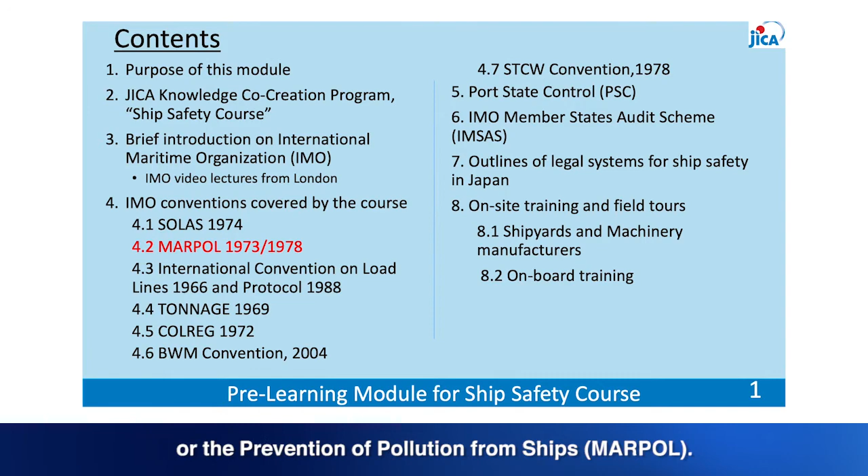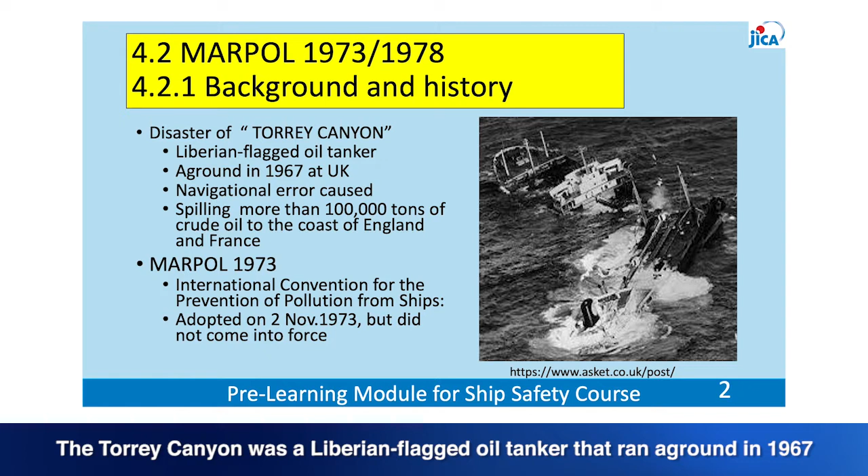MARPOL is the main international convention covering the prevention of marine environment pollution by ships from operational or accidental causes. This slide introduces the Torrey Canyon disaster. The Torrey Canyon was a Liberian-flagged oil tanker that ran aground in 1967 off the western coast of Cornwall, England. The accident was caused by a navigational error. When the ship struck a reef, more than 100,000 tons of crude oil was spilled along the coasts of England and France.

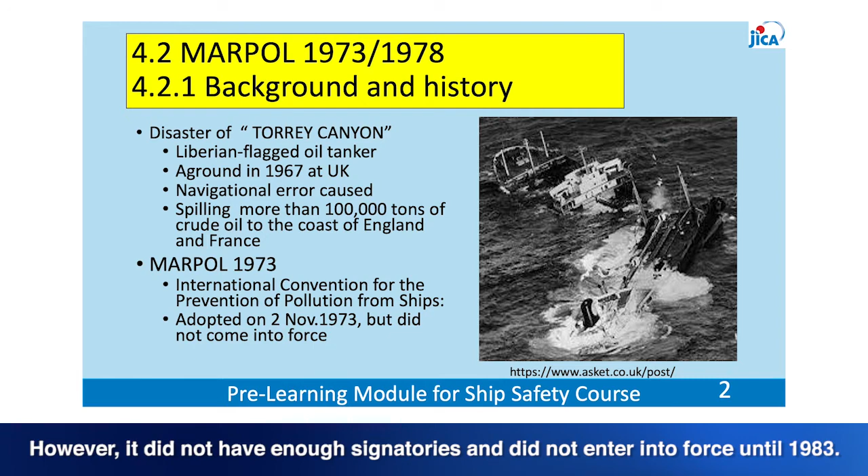MARPOL 1973, the International Convention for the Prevention of Pollution from Ships, was adopted on 2 November 1973 by the International Maritime Organization. However, it did not have enough signatories and did not enter into force until 1983.

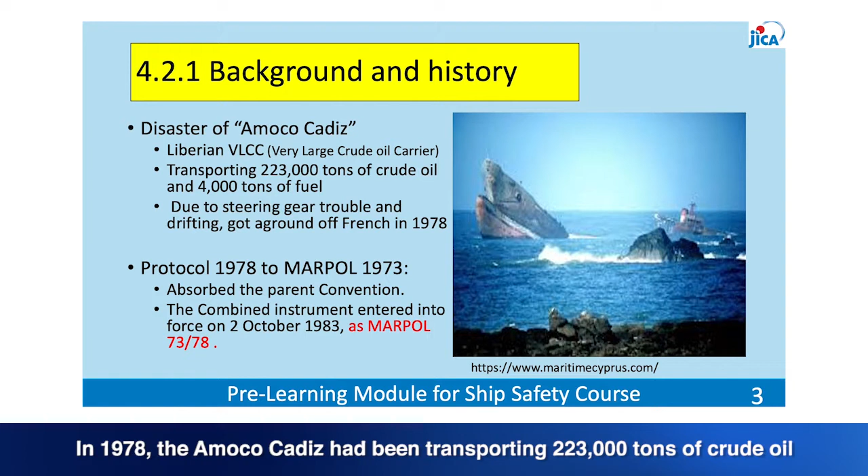During the late 1960s and 1970s, many oil tanker accidents occurred resulting in serious oil pollution. One of the worst was the breakup of the Amoco Cadiz, a very large crude oil carrier (VLCC) registered in Liberia. In 1978, the Amoco Cadiz had been transporting 223,000 tons of crude oil and 4,000 tons of fuel when it ran aground off the French coast after a storm damaged its helm controls. The ship broke in two, spilling its entire cargo of oil.

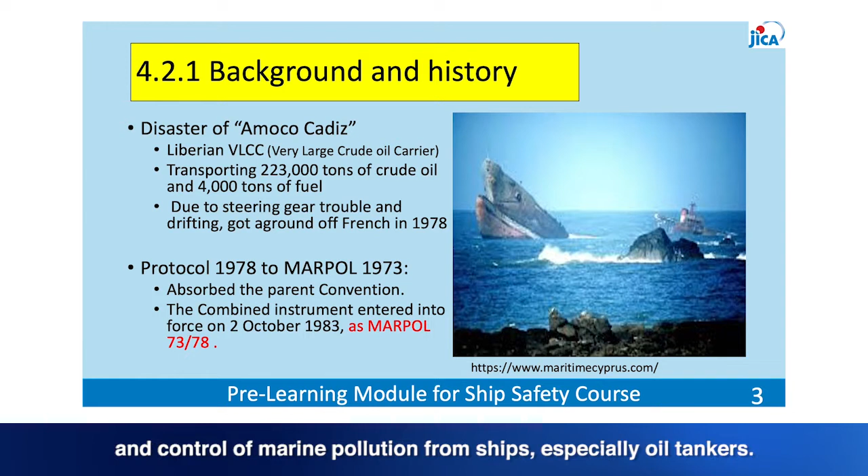Following this and other disasters in 1976 and 1977, the Protocol of 1978 was adopted. Because the 1973 MARPOL was not yet in force, the Protocol absorbed the parent convention and amended. The Protocol included regulations to enforce the prevention and control of marine pollution from ships, especially oil tankers. It entered into force on 2 October 1983 and is known as MARPOL 73-78.

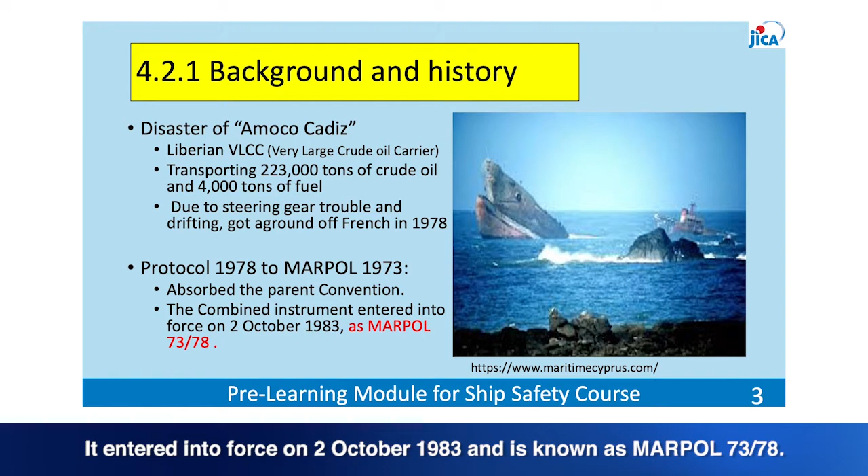The Convention contains the following annexes: Annex 1, Oil. Annex 2, Noxious Liquid Substances (NLSs) in bulk. Annex 3, Harmful Substances Carried by Sea in packaged form. Annex 4, Sewage. Annex 5, Garbage. Annex 6, Air Pollution. The annexes define essential regulations for the prevention of pollution from ships. The most recent, Annex 6, was introduced by Protocol 1997 and entered into force on 19 May 2005.

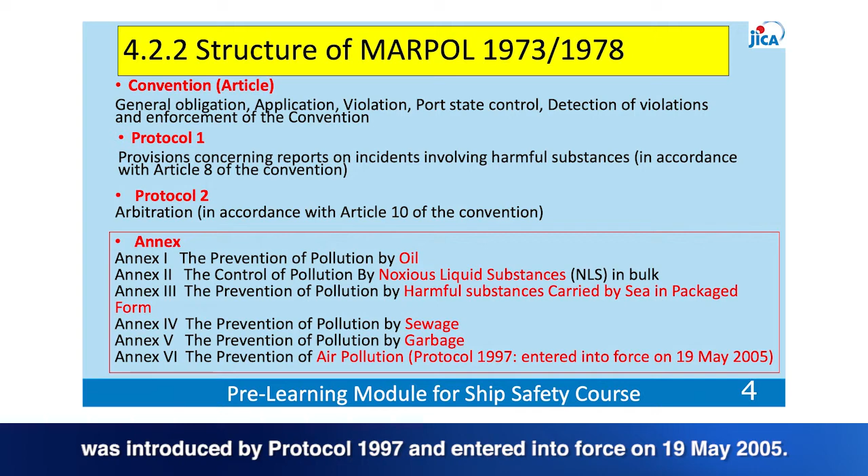This section presents the outlines of MARPOL. Annex 1 covers the prevention of pollution by oil from operational measures and accidental discharges. Regulation 6 is concerned with surveys. Under this regulation, every oil tanker of 150 gross tonnage and above, and every other ship of 400 gross tonnage and above, is subject to initial, renewal, intermediate, and annual surveys.

The 1992 amendments to Annex 1 made it mandatory for new oil tankers to possess double hulls, and also devised a phase-in schedule for existing tankers to be fitted with such hulls, which was subsequently revised in 2001 and 2003. The amendments will be explained in the following slides.

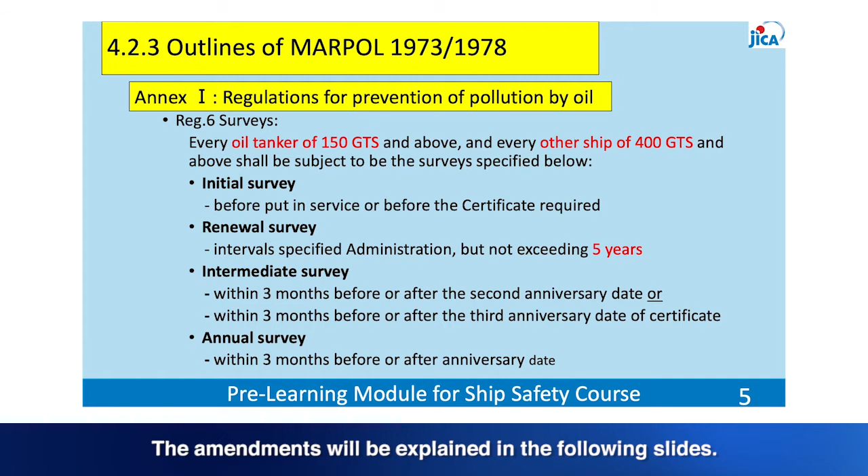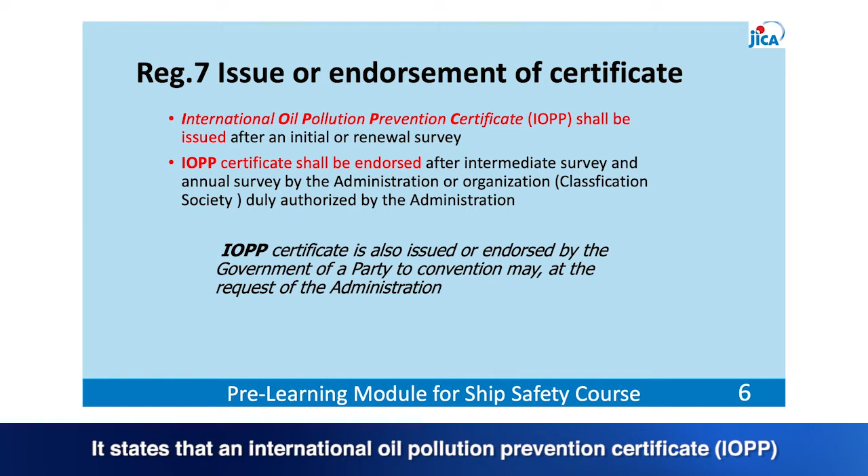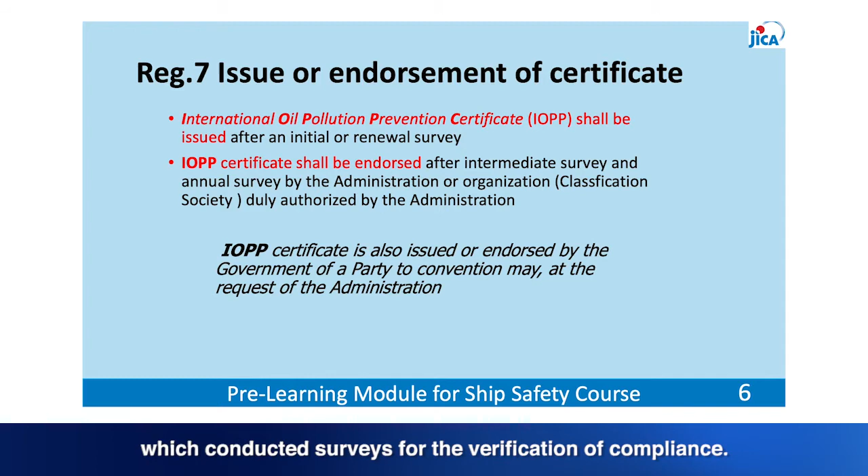Regulation 7 is concerned with the issuance or endorsement of certificates, specifically proof of compliance with Regulation 6. It states that an International Oil Pollution Prevention Certificate (IOPP) shall be issued after an initial or renewal survey, and is endorsed after intermediate and annual surveys by the administration or recognised organisation (RO) which conducted surveys for verification of compliance. Regulation 10 is concerned with the duration and validity of certificates.

It defines how long certificates remain valid before they must be renewed. This slide shows the typical survey schedule and validity of certificates.

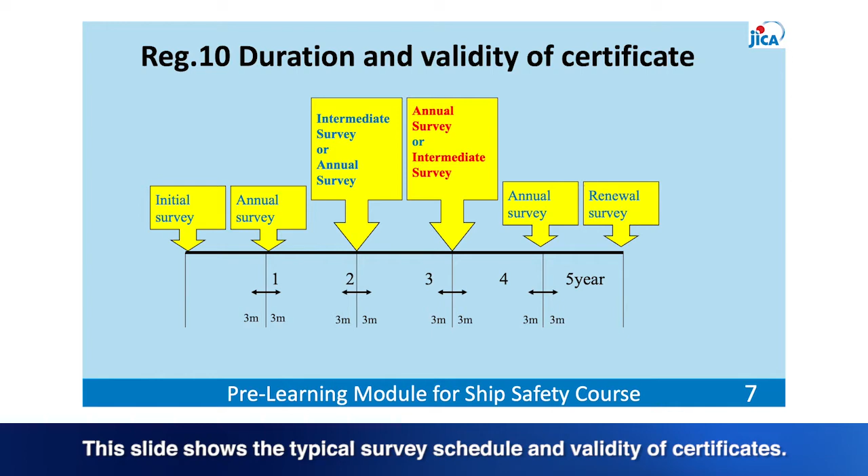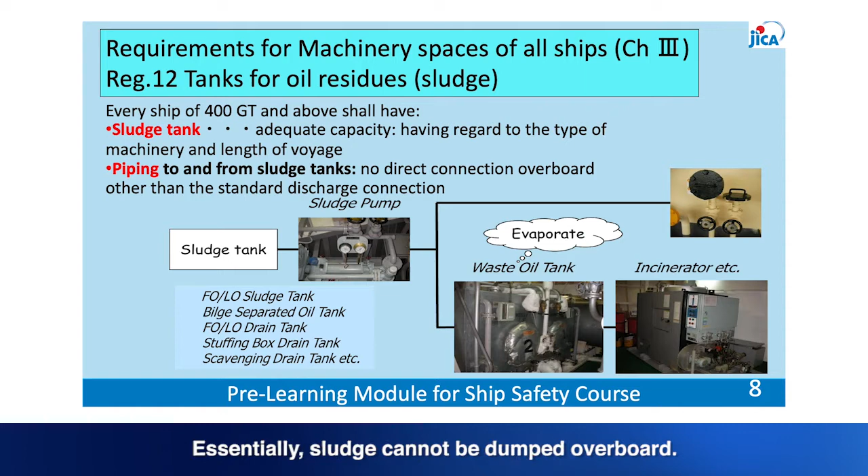Annex 1's Chapter 3 is concerned with the requirements for machinery spaces of all ships, specifically the handling of ship's bilge and sludge. Regulation 12 requires that every ship of 400 gross tonnage and above has a sludge tank with adequate capacity to hold oil residues. Its piping must go only to and from the tanks, with no direct external connection other than the standard discharge connection to the onshore facility. Essentially, sludge cannot be dumped overboard.

Under Regulation 12A on oil fuel tank protection, ships with an aggregate oil fuel capacity of 600 cubic metres and above, delivered on or after 1st August 2010, must comply with this regulation. Individual oil fuel tanks shall not have a capacity over 2,500 cubic metres. Ships must be constructed with a double hull or comply with accidental oil fuel outflow performance standards as indicated in this slide.

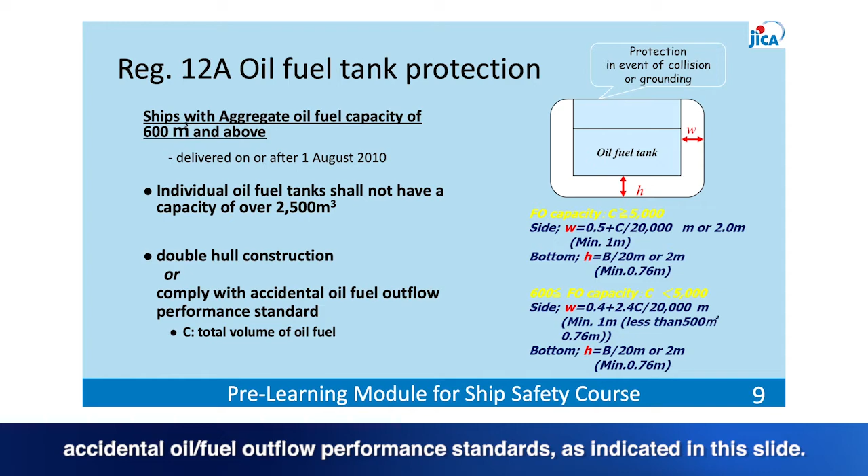Regulation 13 is concerned with the standard discharge connection, specifically the ship-to-shore transfer of ship's bilge and sludge. The ship's discharge pipeline for residues from machinery bilges and oil residue shall be fitted with a standard discharge connection for shore facilities, as indicated in this slide.

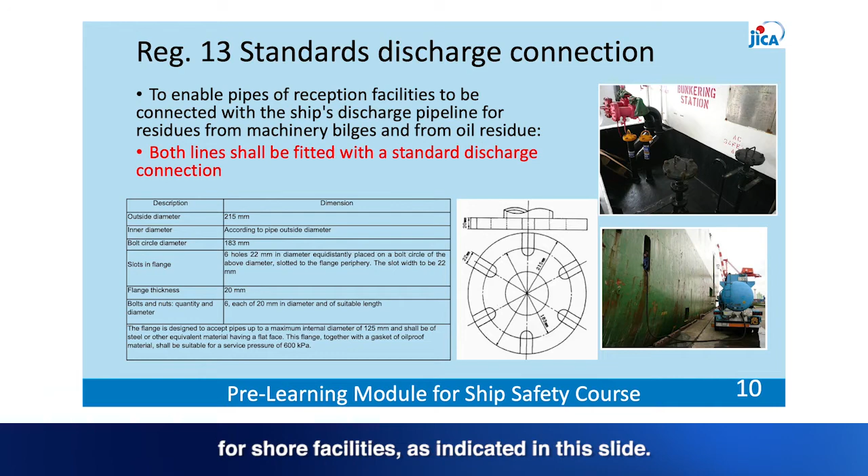Regulation 14 is concerned with oil filtering equipment. Under this regulation, any ship of 400 gross tonnage and above, but less than 10,000 gross tonnage, shall be fitted with oil filtering equipment complying with paragraph 6 of this regulation, that is, equipment that automatically stops discharge into the sea when the effluent's oil content is 15 ppm or higher.

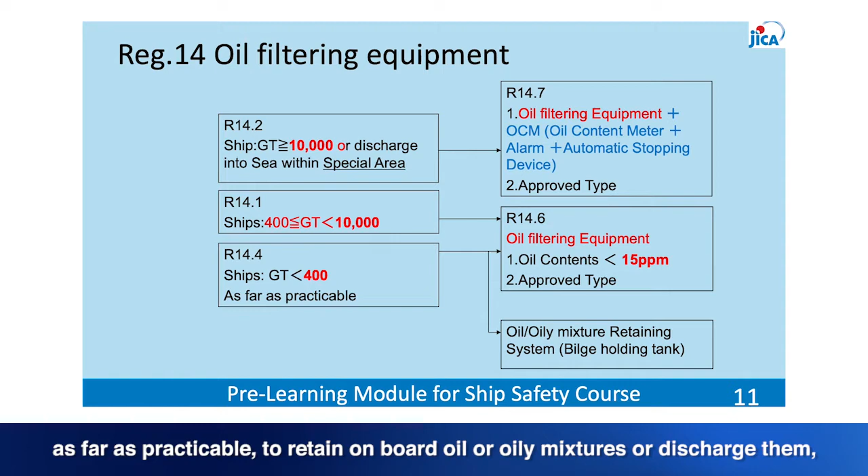Any ship of 10,000 gross tonnage and above shall be fitted with oil filtering equipment complying with paragraph 7 of this regulation, that is, equipment that automatically stops discharge into the sea when the effluent's oil content is 15 ppm, and has an oil content meter with an alarm and automatic stopping device. The administration shall ensure that ships of less than 400 gross tonnage are equipped, as far as practicable, to retain onboard oil or oily mixtures or discharge them through the oil filtering system.

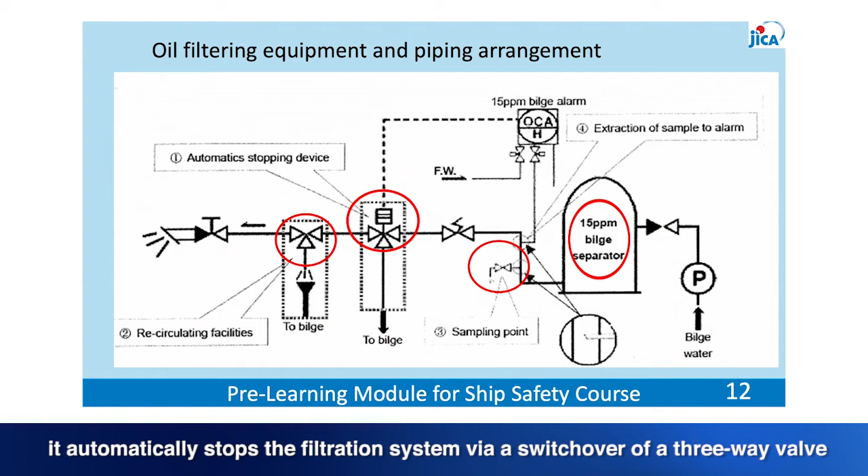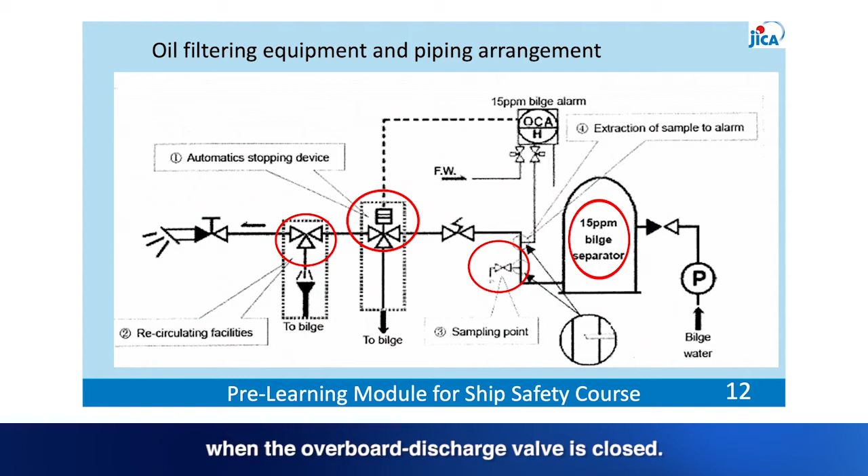It automatically stops the filtration system via a switchover of a three-way valve and an alarm on the oil content monitor. The automatic shutdown activates at an oil content of 15 ppm. Recirculating facilities enable the automatic stopping device to be tested when the overboard discharge valve is closed. A sampling point must be provided in a vertical section of the bilge separator's outlet piping to allow a visual check. This slide shows the oil filtering equipment and accessories.

During this course, there will be a technical visit to Taiko Kikai Kogyo Company Limited, one of Japan's leading manufacturers of oil-water separators.

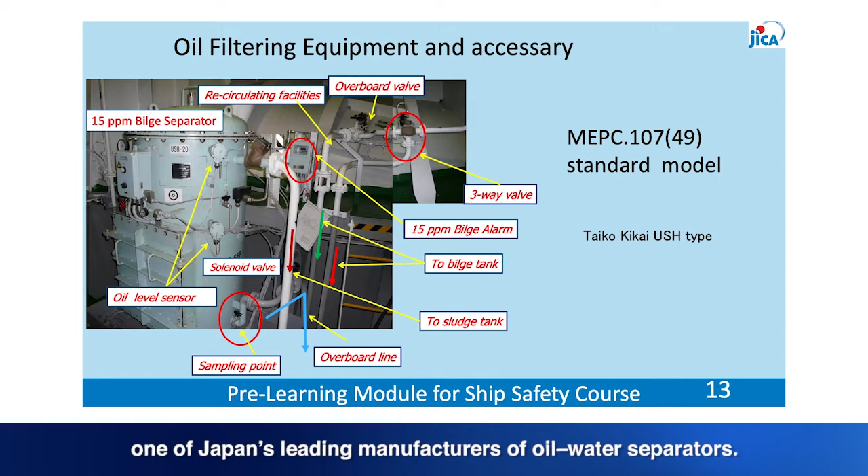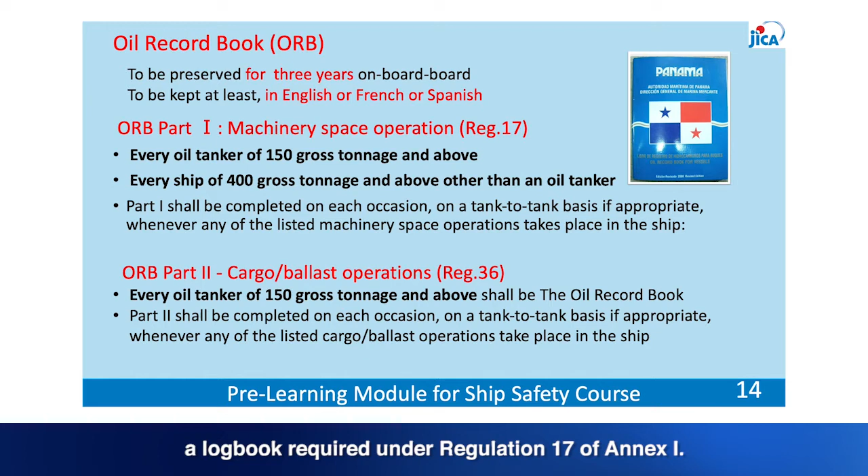This slide shows an example of an oil record book, ORB, a logbook required under Regulation 17 of Annex 1. The ORB is used as evidence in case of oil-related incidents. A ship's ORB must be preserved for at least 3 years after its last entry. The entries must be made in at least either English, French or Spanish.

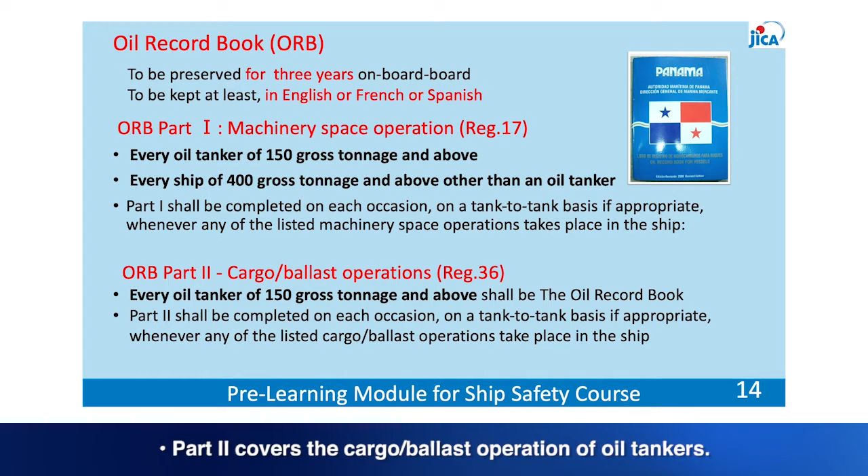Part 1 of an ORB covers the machinery operation of all ships. Part 2 covers the cargo and ballast operation of oil tankers. Chapter 4 of Annex 1 covers the requirements for the cargo areas of oil tankers. Regulation 19 mandates a double hull and a double bottom for oil tankers delivered on or after 6 July 1996.

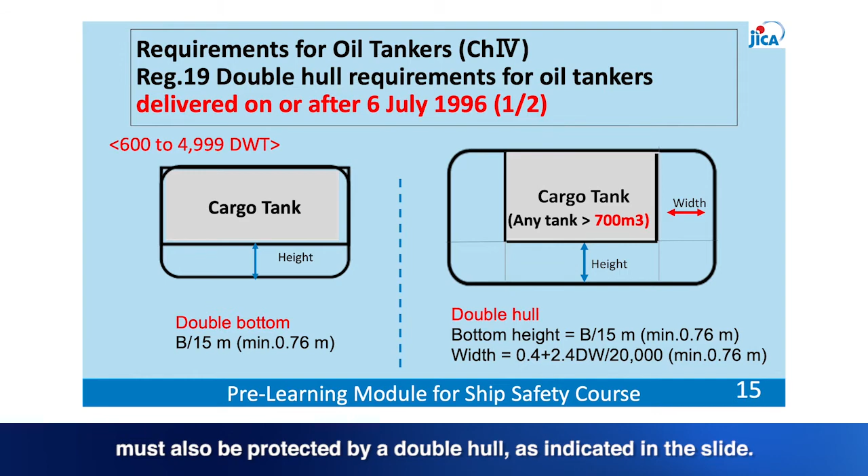A double bottom must protect the cargo tanks of every oil tanker of 600 deadweight tonnage and above, but less than 5,000 deadweight tonnage. Any cargo tank more than 700 cubic metres must also be protected by a double hull, as indicated in the slide.

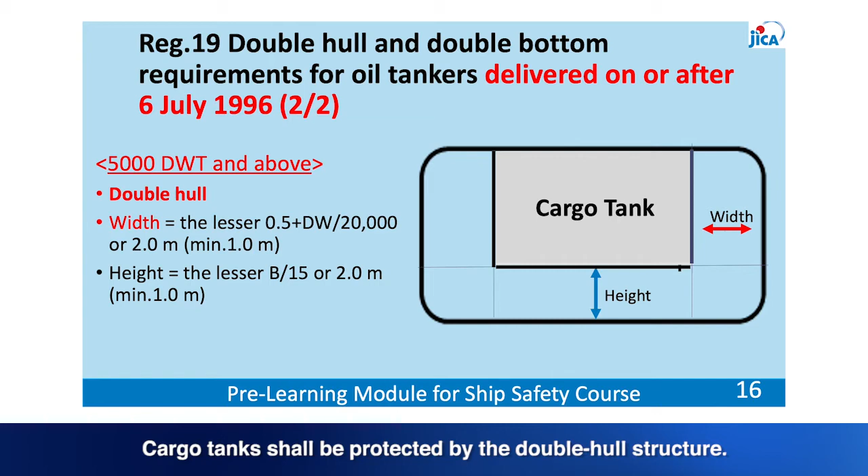This slide shows the incidence of serious oil spills caused by old single-hulled oil tankers. The first is that of Erika, a 24-year-old Maltese-registered oil tanker that leaked about 20,000 tons of fuel into the sea after it sank off the coast of northwest France in a storm in December 1999. The next is that of Prestige, a 26-year-old Greek-operated single-hulled oil tanker that sunk in a storm off the coast of Spain in November 2002, spilling 60,000 tons of heavy fuel oil.

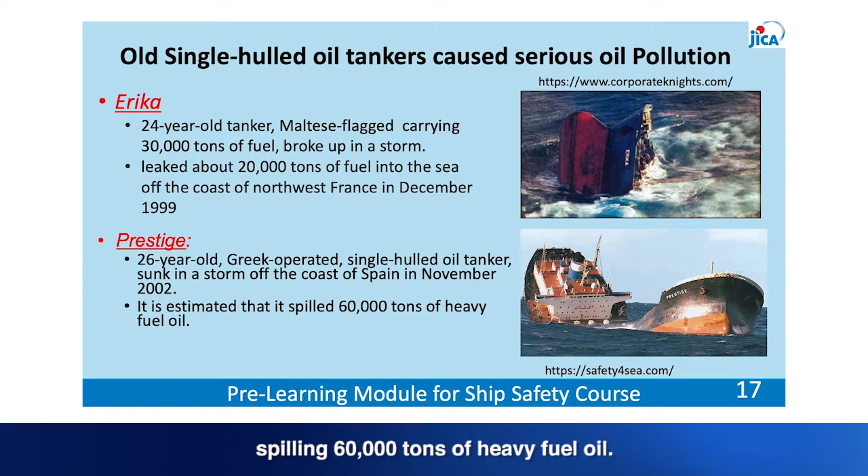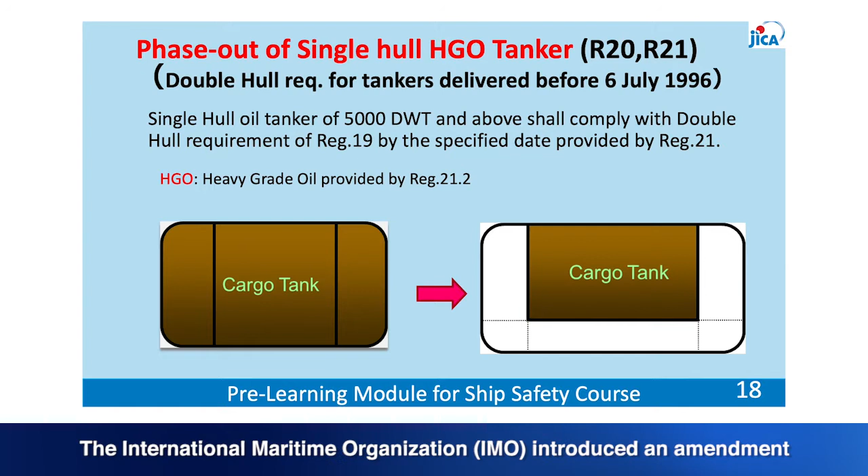Regarding the phase-out of single-hull heavy-grade oil HGO tankers, the double hull requirements of Regulation 19 apply to oil tankers delivered on or after 6 July 1996. However, in consideration of the many serious oil-polluting disasters associated with old single-hull oil tankers, including those shown in the previous slide, the International Maritime Organization, IMO, introduced an amendment to speed up the phase-out of single-hull HGO tankers.

MARPOL Annex 2 covers Regulations for the Control of Noxious Liquid Substances, NLSs, in bulk. Annex 2 details the discharge criteria and measures for the control of pollution by NLS carried in bulk. Some 250 substances were evaluated and included in the list appended to the Convention.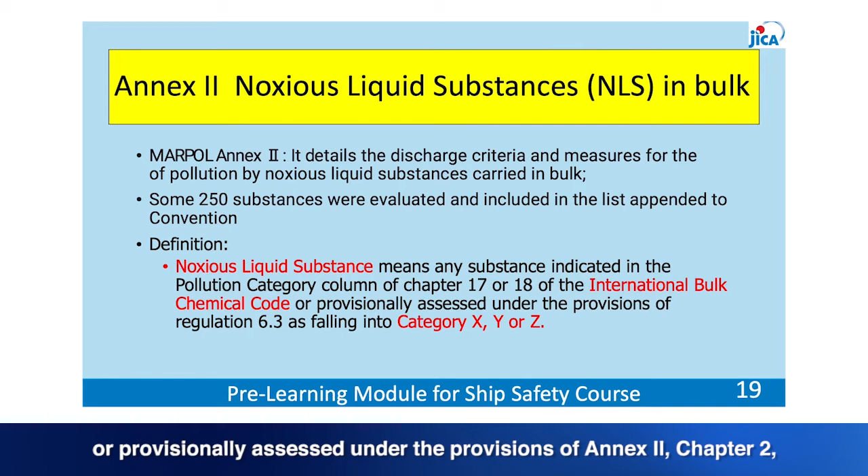Noxious liquid substance refers to any substance categorized as a pollutant in Chapter 17 or 18 of the International Bulk Chemical (IBC) Code, or provisionally assessed under the provisions of Annex 2, Chapter 2, Regulation 6.3, as falling into categories X, Y, or Z.

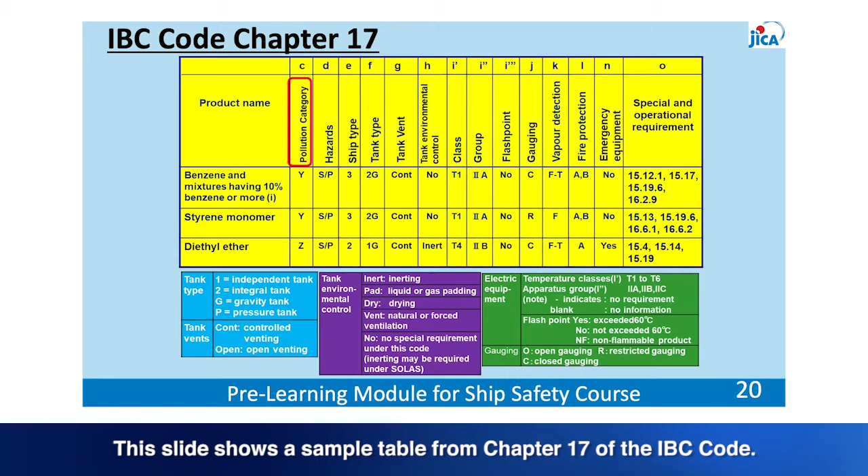The IBC Code's Chapter 17 lists the chemical products included in the scope of the Code's application, noxious liquid substances, in pollution categories X, Y, or Z, Regulation 6.1. The IBC Code's Chapter 18 lists the chemical products outside the scope of the Code. As indicated in the slide, these include some NLSs in pollution category Z, Regulation 6.1.

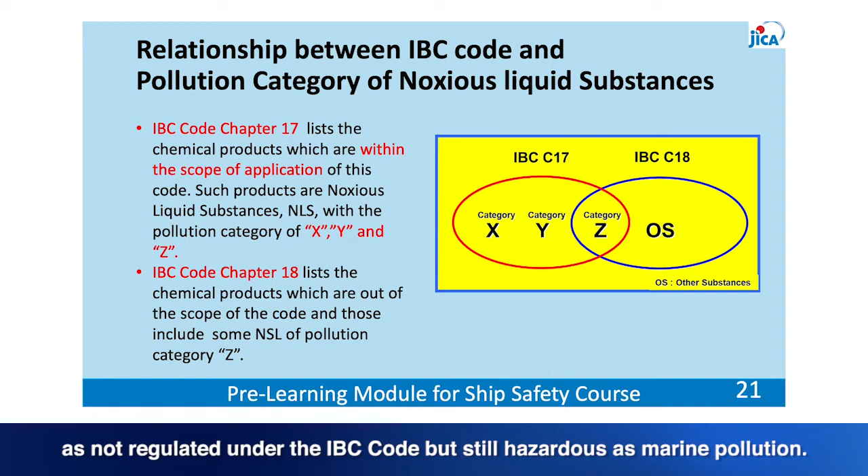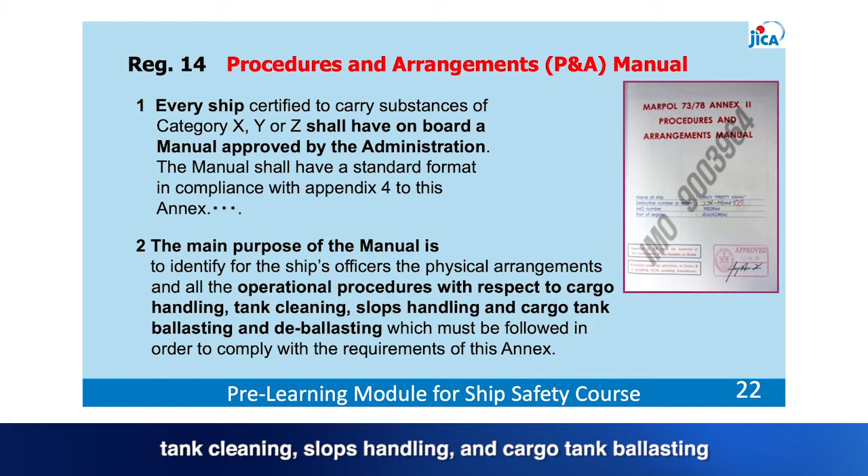This slide shows the Procedures and Arrangements P&A manual. Ships officers use this manual to identify the physical arrangements and operational procedures that must be followed for cargo handling, tank cleaning, slops handling, and cargo tank ballasting and deballasting to comply with the requirements of MARPOL Annex 2.

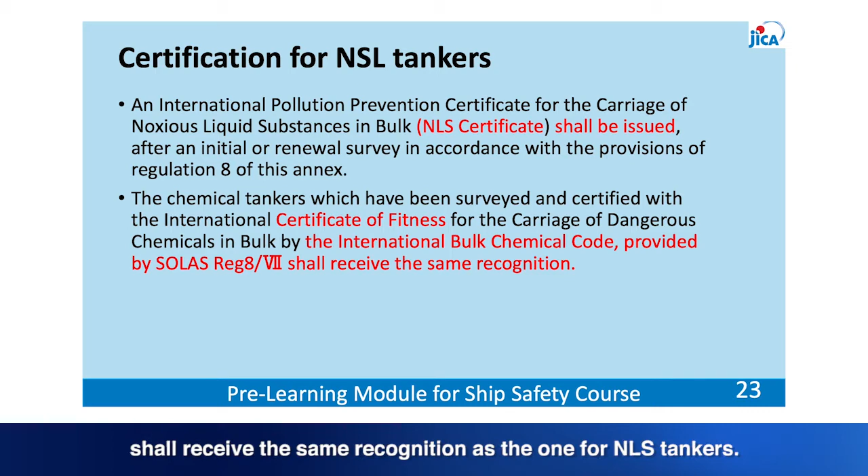An International Pollution Prevention Certificate for the carriage of noxious liquid substances in bulk, NLS certificate, shall be issued after an initial or renewal survey in accordance with the provisions of Regulation 8 of this annex. Chemical tankers that have been surveyed and NLS certified under the IBC Code shall receive the same recognition as the one for NLS tankers.

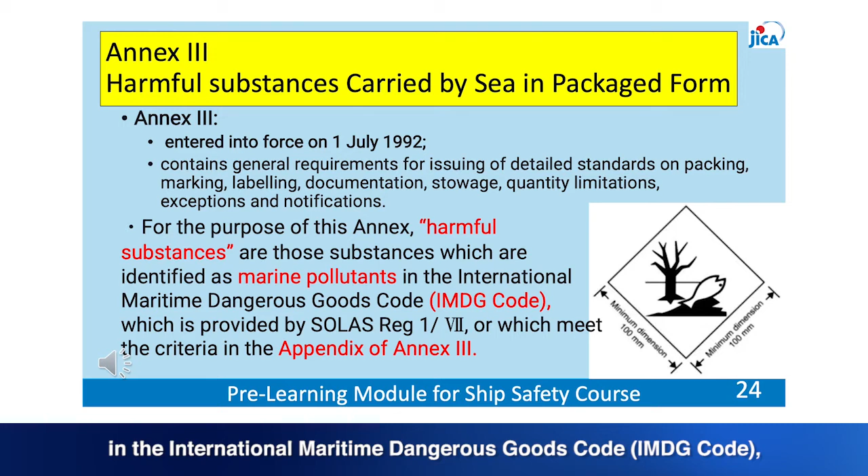Annex 3: Regulation for the Prevention of Pollution by Harmful Substances carried by sea in packaged form. The Annex entered into force on 1 July 1992. It stipulates general requirements for issuing detailed standards on packing, marking, labelling, documentation, stowage, quantity limitations, exceptions, and notifications. For the purpose of Annex 3, harmful substances refers to substances identified as marine pollutants in the International Maritime Dangerous Goods Code, IMDG Code, provided by the International Convention for the Safety of Life at Sea, SOLAS, Chapter 7, Regulation 1, or substances that meet the criteria in the appendix of Annex 3.

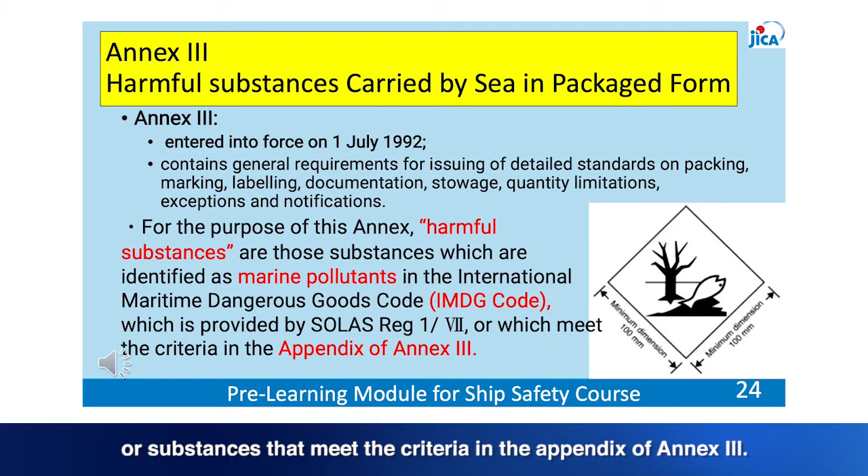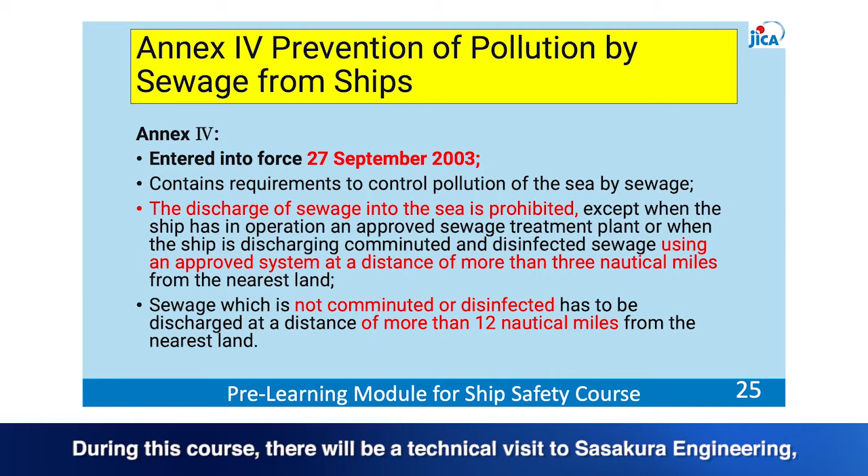During this course, there will be a technical visit to Sasakura Engineering, one of Japan's leading manufacturers of sewage treatment units.

Annex 5: Regulations for the Prevention of Pollution by Garbage from Ships. The Annex entered into force on 31 December 1988. It deals with different garbage types and specifies the distances from land and how garbage can be disposed of. The most important feature of this annex is its complete ban on disposing into the sea of all forms of plastics, including ash.

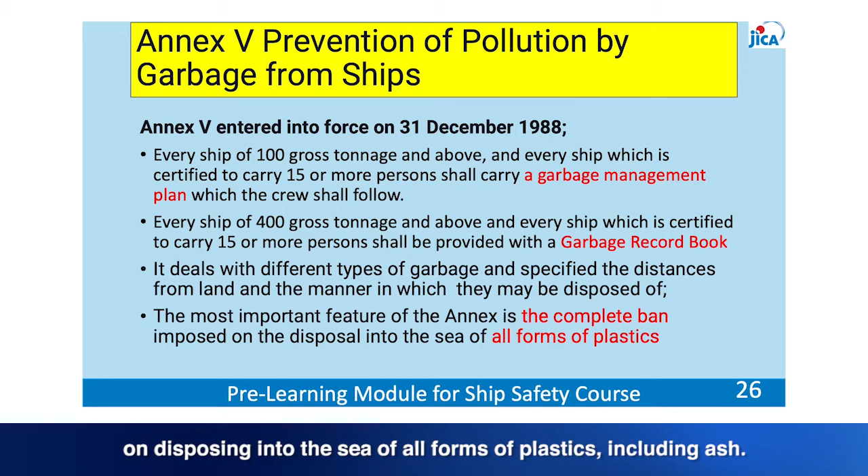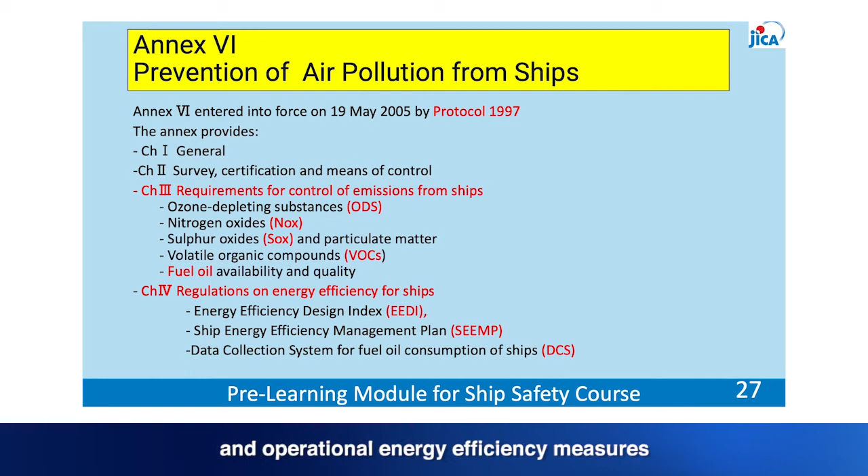Annex 6: Regulations for the Prevention of Air Pollution from Ships. The Annex entered into force on 19 May 2005 as Protocol 1997. The slide shows the structure of Annex 6. Chapter 3 prohibits deliberate emissions of ozone-depleting substances, sets the limits of emissions from ship exhaust on sulfur oxides and nitrogen oxides, and designates emission control areas, ECAs, with stricter standards for sulfur oxides and nitrogen oxides. Chapter 4, newly adopted in 2011, covers mandatory technical and operational energy efficiency measures to reduce greenhouse gas emissions from ships.

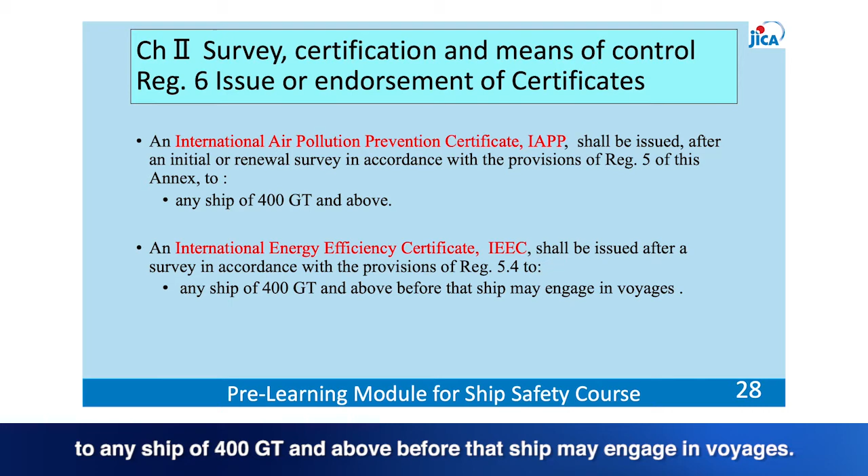Chapter 2: Survey, Certification and Means of Control. Regulation 6 is concerned with the issuance or endorsement of certificates. It covers air pollutant certification. An International Air Pollution Prevention Certificate, IAPP, and an International Energy Efficiency Certificate, IEEC, shall be issued after an initial or renewal survey in accordance with the provisions of Regulation 5.1 and 5.4 of this Annex to any ship of 400 gross tonnage and above before that ship may engage in voyages.

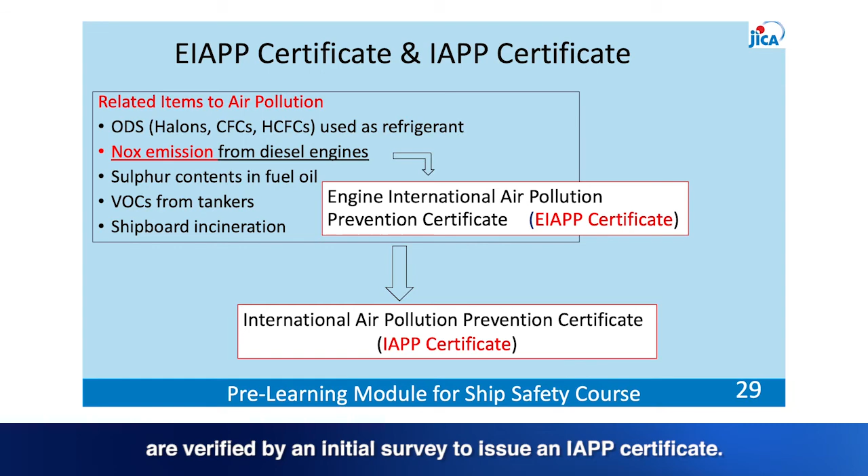This slide shows the process for issuing IAPP certificates to ships. An Engine International Air Pollution Prevention Certificate, EIAPP, is issued to diesel engines which have been verified as complying with regulations concerning nitrogen oxide emissions. Other regulated items, such as the emission of ozone-depleting substances, ODSs, sulfur contents in fuel oil, volatile organic compounds, VOCs, and shipboard incineration, are verified by an initial survey to issue an IAPP certificate.

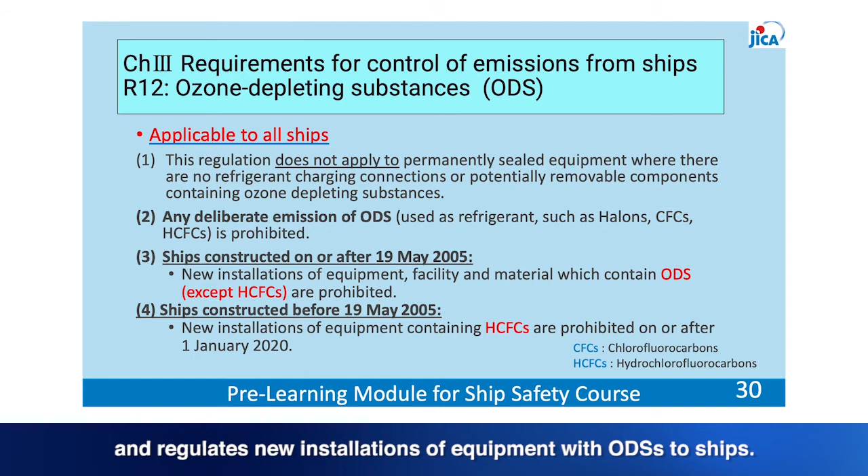Chapter 3 is concerned with requirements regarding the control of emissions from ships. Regulation 12 is concerned with ODSs. The regulation applies to all ships. Nevertheless, the regulation does not apply to permanently sealed equipment where there are no refrigerant charging connections or potentially removable components containing ODSs, such as refrigerators for domestic use. The regulation defines ODSs, prohibits any deliberate emissions, and regulates new installations of equipment with ODSs to ships.

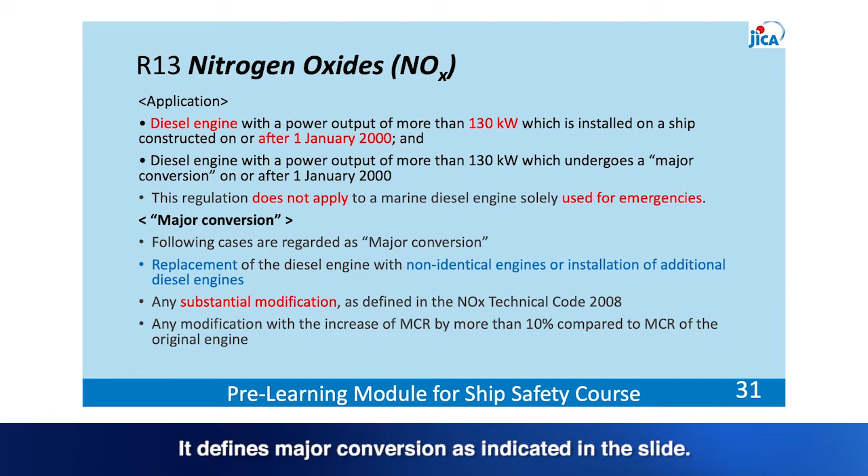Regulation 13 is concerned with nitrogen oxides. It applies to diesel engines with a power output of more than 130 kilowatts installed on a ship constructed on or after 1 January 2000, and diesel engines with a power output of more than 130 kilowatts that undergo a major conversion on or after 1 January 2000. Regulation 13 does not apply to marine diesel engines used solely for emergencies. It defines major conversion as indicated in the slide.

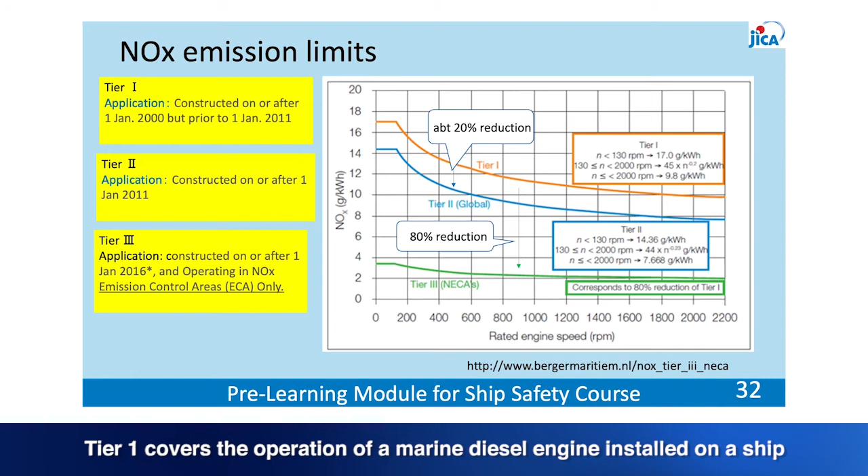This slide illustrates the concept of nitrogen oxide emission limits. Marine diesel engines must meet the standards of the nitrogen oxide emission limits shown in this slide. Tier 1 covers the operation of a marine diesel engine installed on a ship constructed on or after 1 January 2000 and prior to 1 January 2011. Tier 2 covers the operation of a marine diesel engine installed on a ship constructed on or after 1 January 2011. The Tier 2 levels are about 20% lower than the Tier 1 levels.

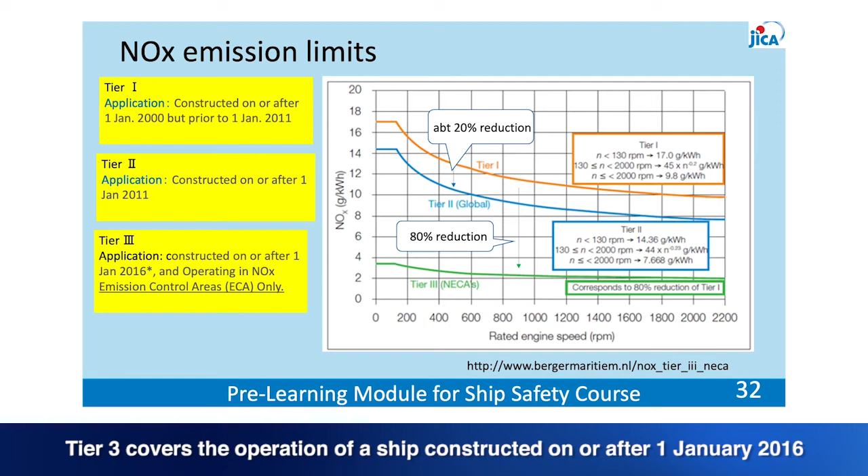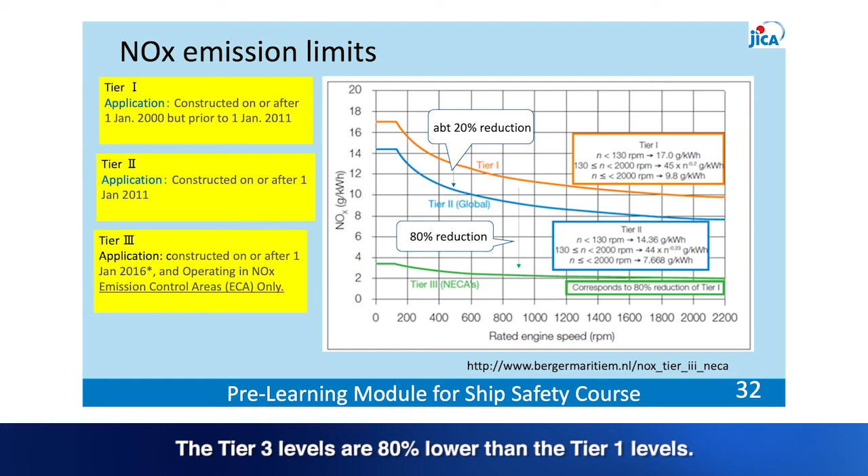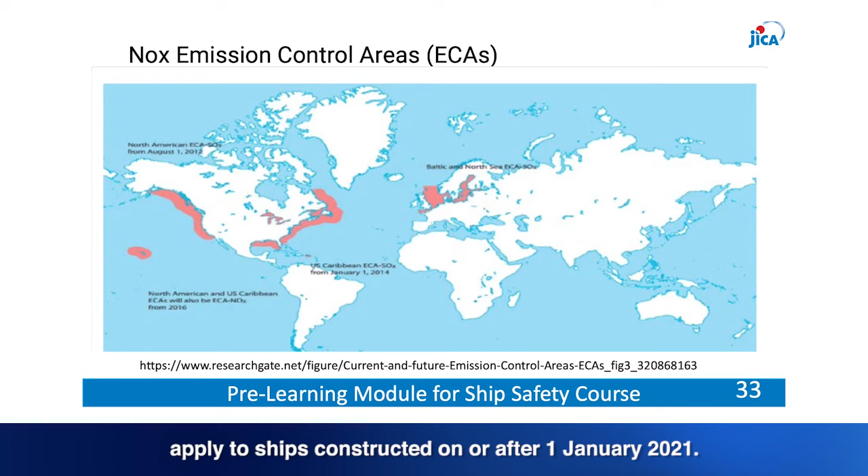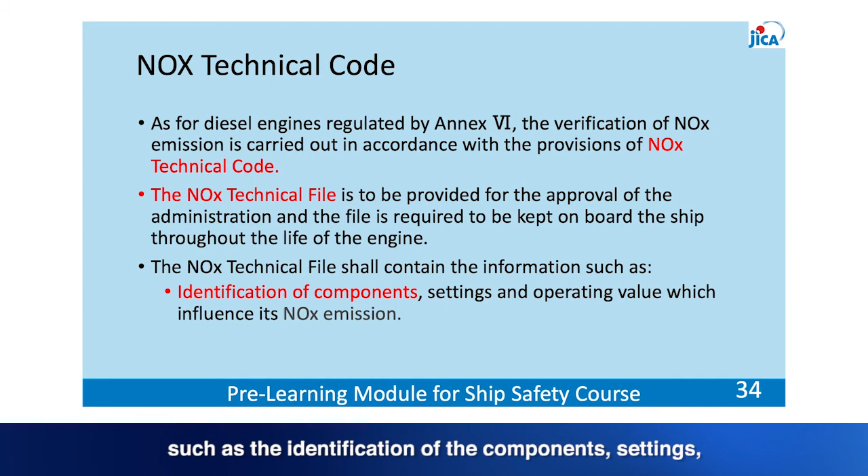Regarding the nitrogen oxide technical code, for diesel engines regulated by Annex 6, the verification of nitrogen oxide emission is carried out in accordance with the provisions of the nitrogen oxide technical code. For each nitrogen oxide certified diesel engine, there must be on board a nitrogen oxide technical file approved by the administration throughout the life of the engine. The file must contain information such as the identification of components, settings, and operating values that influence its nitrogen oxide emission.

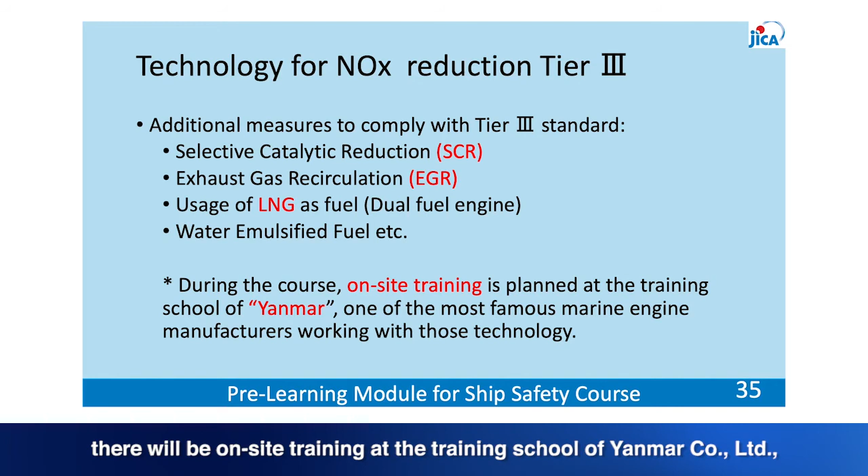This slide introduces the current technology for nitrogen oxide reduction, Tier 3. This includes selective catalytic reduction (SCR), exhaust gas recirculation (EGR), and usage of liquefied natural gas (LNG) or water emulsified fuel. During the course, there will be on-site training at the training school of Yanmar Company Limited, one of Japan's leading manufacturers of marine diesel engines that use new technologies.

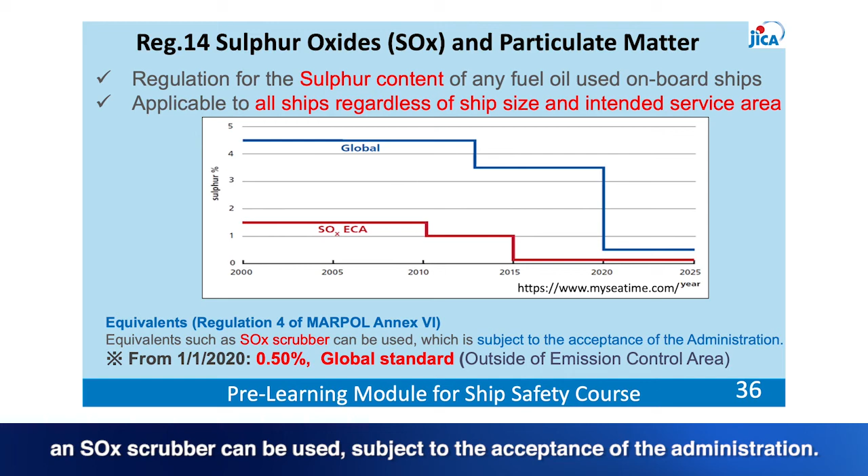Regarding requirements in emission control areas, sulfur oxides ECA is indicated by a red line on the slide. While a ship is operating within an ECA, the sulfur content of its fuel cannot exceed 0.10% mass. As an equivalent provided by Regulation 4 of MARPOL Annex 6, a sulfur oxide scrubber can be used, subject to the acceptance of the administration.

Regulation 15 is concerned with volatile organic compounds, VOCs. It applies to tankers and controls VOC emissions for cargo transfer operations.

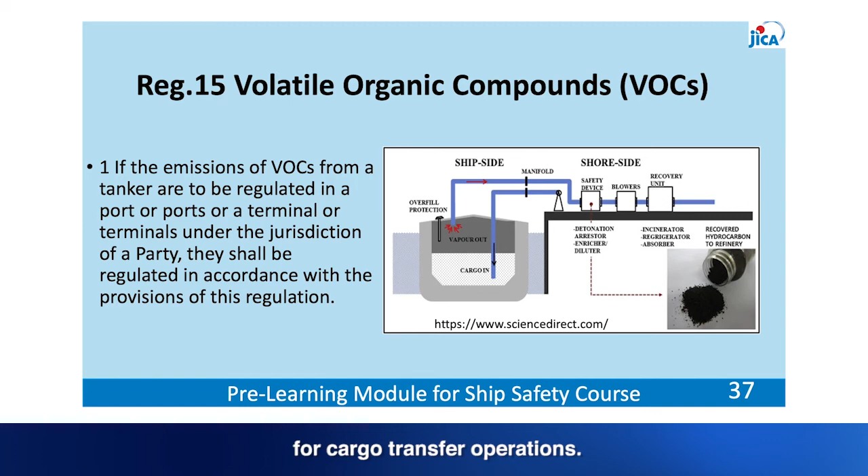Regulation 18 is concerned with fuel oil availability and quality. It ensures the availability of fuel and operational procedures in cases where a port state finds a ship that is not in compliance with the relevant regulations.

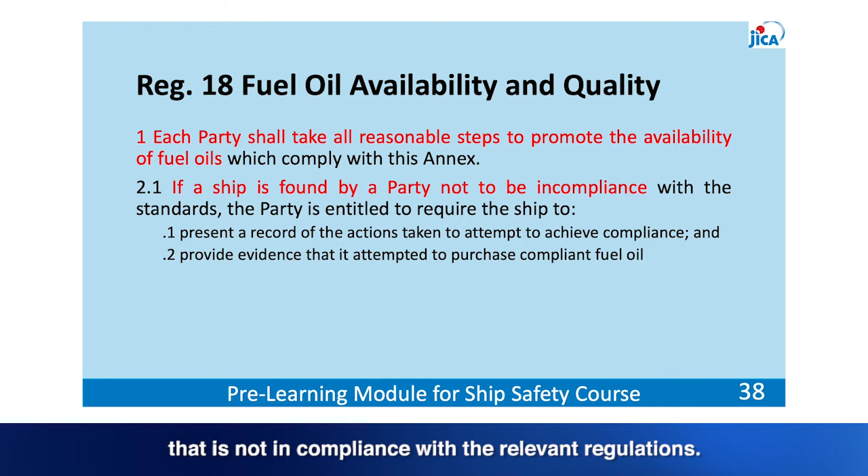Chapter 4 is concerned with regulations on energy efficiency for ships, that is, greenhouse gas measures. The United Nations Framework Convention on Climate Change (UNFCCC), commonly called the Paris Agreement, is a legally binding international treaty on climate change. It was adopted on 12 December 2015 by 196 parties at COP21 in Paris.

It entered into force on 4 November 2016. Its goal is to keep the increase in global warming to well below 2 degrees Celsius, preferably 1.5 degrees Celsius above pre-industrial levels. The agreement recognises that maritime transport is responsible for around 2.5% of global emissions, and emissions are expected to grow 50 to 250% by 2050.

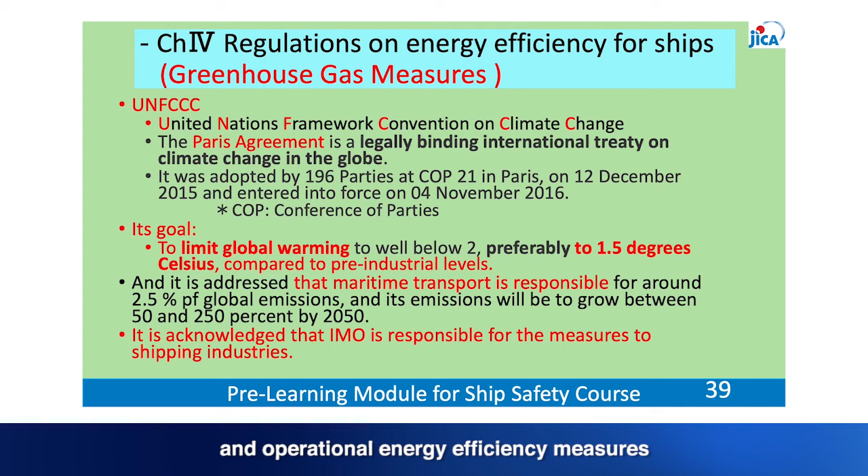This was summarised as follows. Short-term goal: by 2030, reduce CO2 emissions from transport work by at least 40%. Medium-term goal: by 2050, reduce CO2 emissions from transport work by approximately 70%, or reduce the total annual GHG emissions by at least 50%. Long-term goal: in this century, phase out GHG emissions as soon as possible.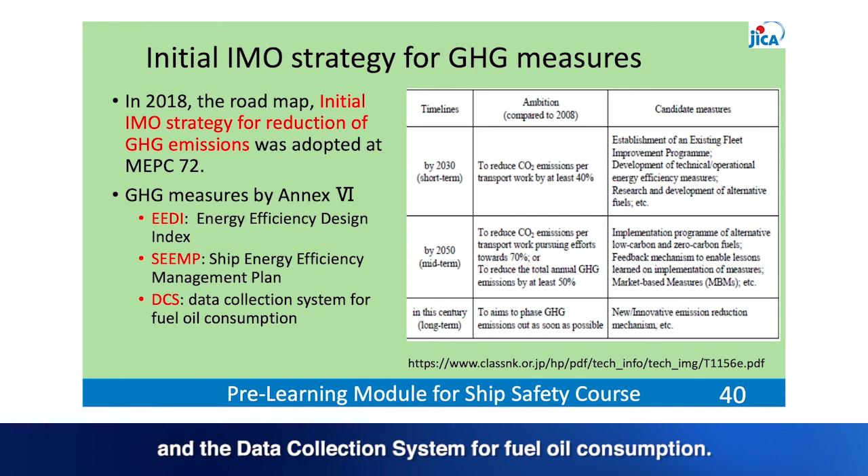To achieve these targets, MARPOL Annex 6 introduced tools such as the Energy Efficiency Design Index (EEDI), the Ship Energy Efficiency Management Plan, and the Data Collection System for Fuel Oil Consumption.

The attained EEDI value is confirmed via actual sea trials. The attained EEDI value cannot be more than the calculated value of the required EEDI. Both EEDI values are indicated on the Energy Efficiency Certificate. During the course, there will be a technical visit to the National Maritime Research Institute, which has one of the biggest towing tanks for confirming ships' EEDI values.

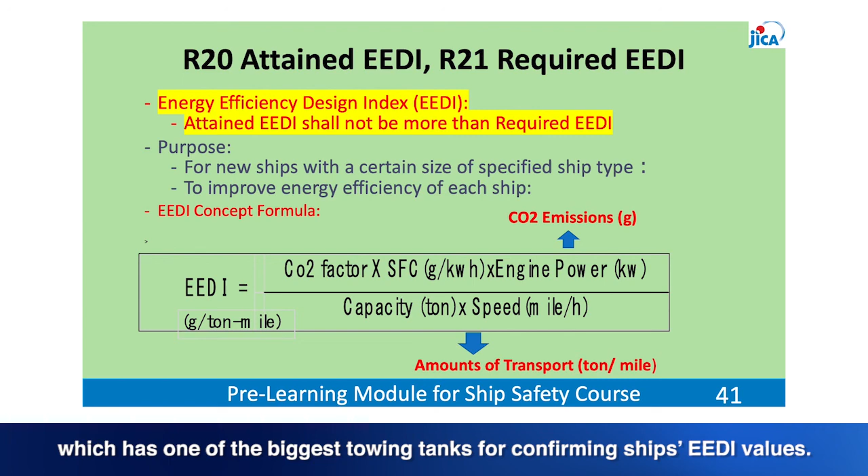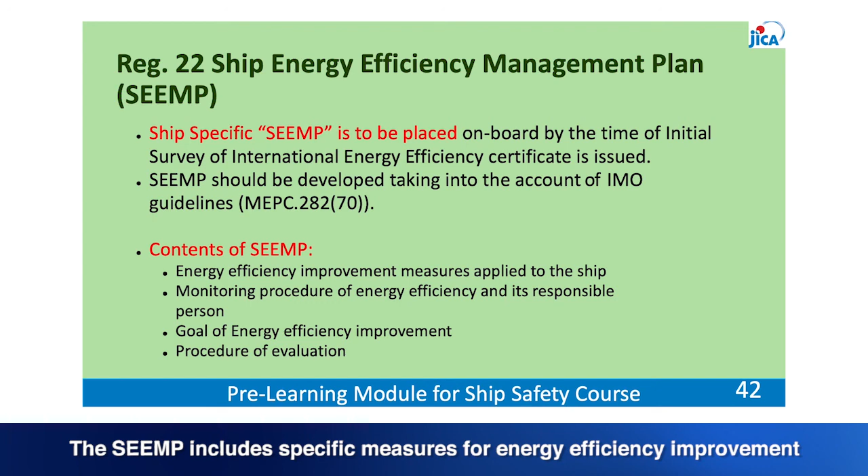Regulation 22 is concerned with the Ship Energy Efficiency Management Plan (SEEMP). A ship-specific SEEMP must be placed on board by the time the initial survey of the International Energy Efficiency Certificate is issued. The SEEMP includes specific measures for energy efficiency improvement to be applied to each ship.

Regulation 22A is concerned with the collection and reporting of ship fuel oil consumption data. It introduced the data collection system for ships' fuel oil consumption and came into force on 1 March 2018. Data are transferred to the IMO's Ship Fuel Oil Consumption Database. The Secretary-General has to produce an annual report for the MEPC.